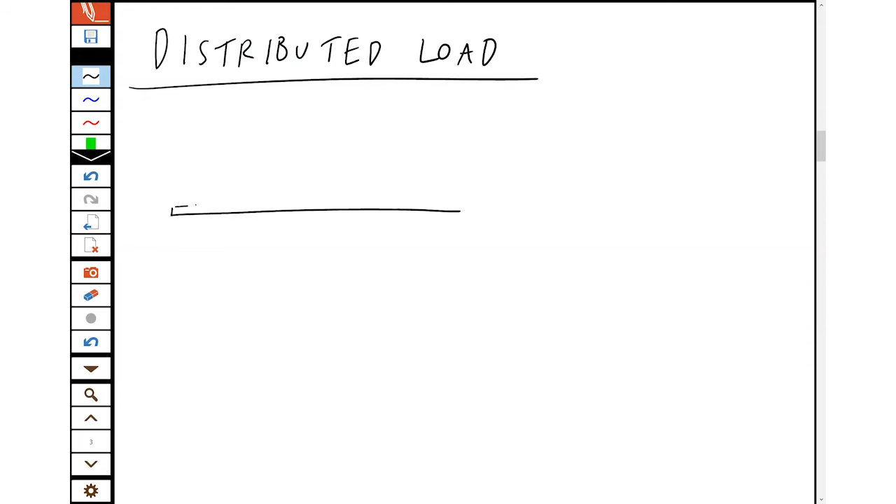Up until now, we've been looking at point loads. We have problems like if we have a beam with a pin at A and a roller at B, and we just have a single point force of 20 newtons down, like there was a mass pushing down there, or there was a beam pushing down at that point. And we'd label that point C just to make it easier for ourselves to deal with.

But we're not always going to have single point loads like that. You might have a distributed load. Like let's say you had a bridge with a lot of cars constantly flowing over it, or you had a bridge or embankment holding up a load of mud or a load of water. Fluid problems have a lot of this distributed load stuff.

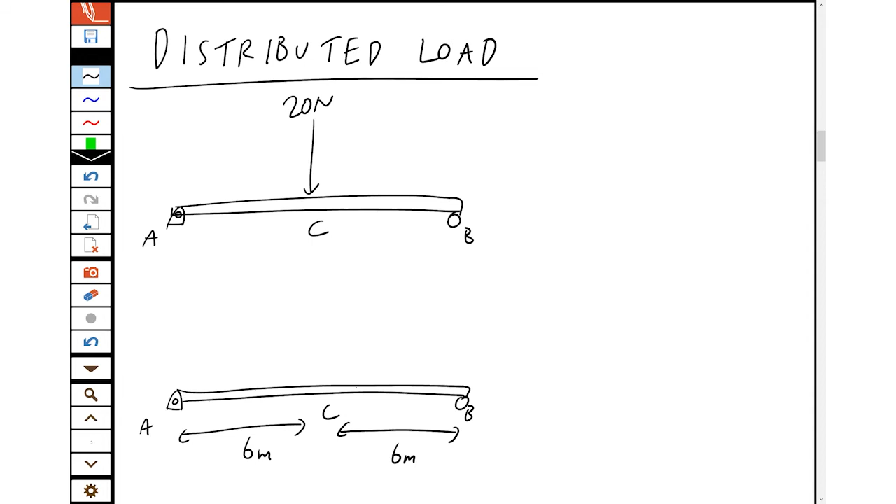So instead, you would have a situation with a pin at A, a roller at B, midpoint C, and instead of having single point loads, you could have distributed loads. Like you might have a constant load of 10 newtons per meter acting all over the beam there, and a load increasing from 0 to 10 between those 2 points, and then be asked to find the support reactions, which would be at A and B.

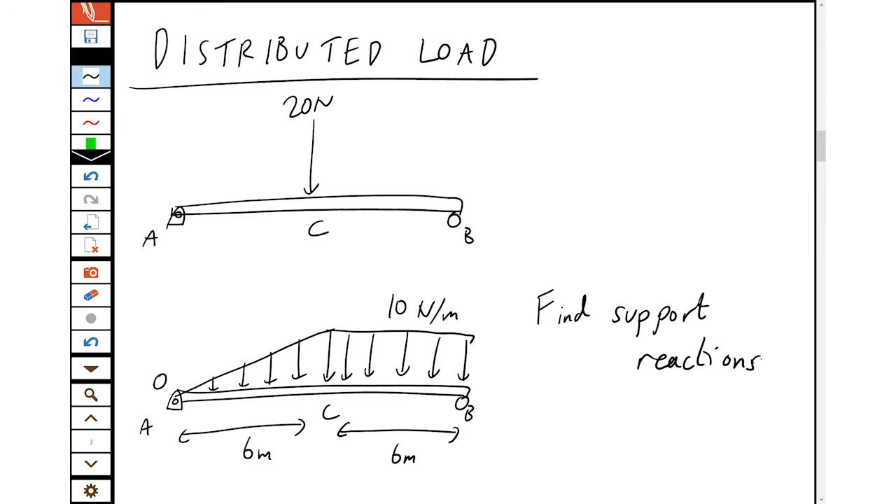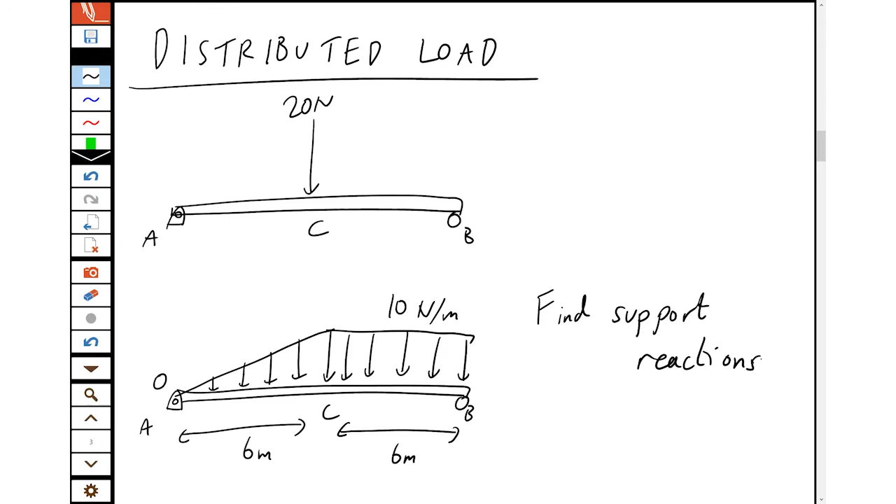Sometimes that's the whole problem. Sometimes that's something you need to do at the start to move into the rest of the problem. So how would we do that? Well, first we have to work out how to deal with these distributed loads, and what we do is we replace them with equivalent forces at certain locations.

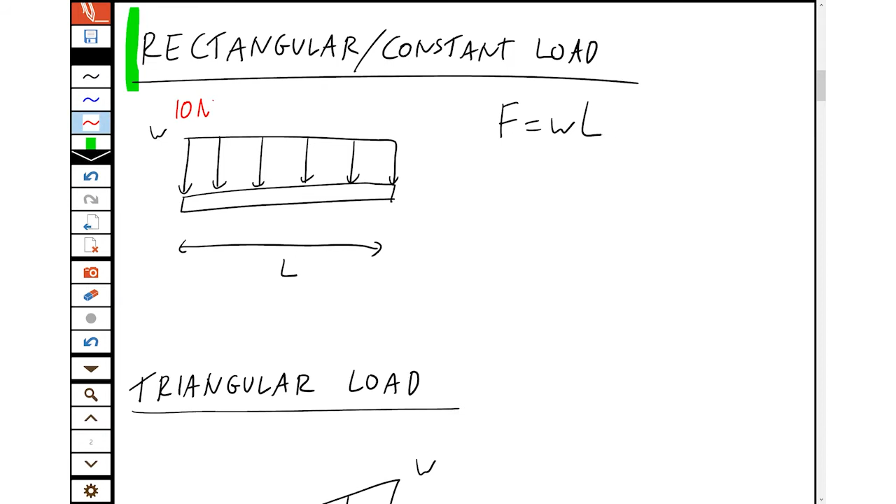The first kind is a rectangular or a constant load. Now we can see if we have a constant load over a length, then the equivalent force is just the distributed load times the length. For example, if this was a load of 10 newtons per meter over 6 meters, then we've 10 newtons for every meter times 6 meters gives us 60 newtons.

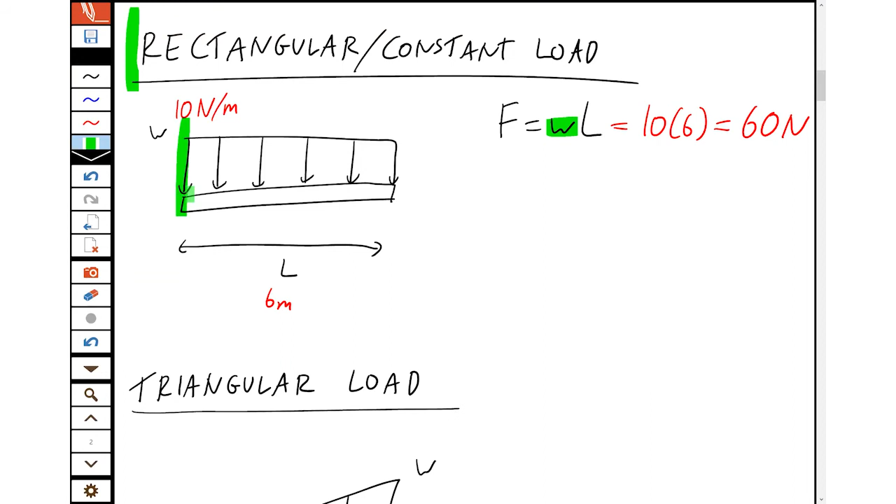Makes sense? And we can see another cute thing about this. This is the distributed load, the height there, times the length. So this is actually the area of the distributed load. And that works perfectly. It's not a one-time coincidence. That's exactly what's going on there. So we can always use that as an idea.

So where do we put this force? Well, this is at the midpoint of the distributed load. It's actually at the centroid of the shape. And the centroid of the load, the center of the shape, is at its middle. So we now have this equivalent force acting at the midpoint, half the length from the edges.

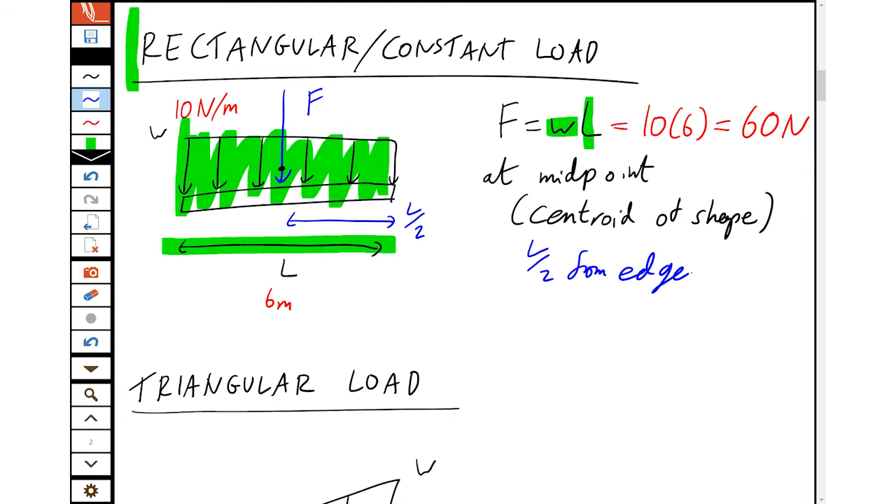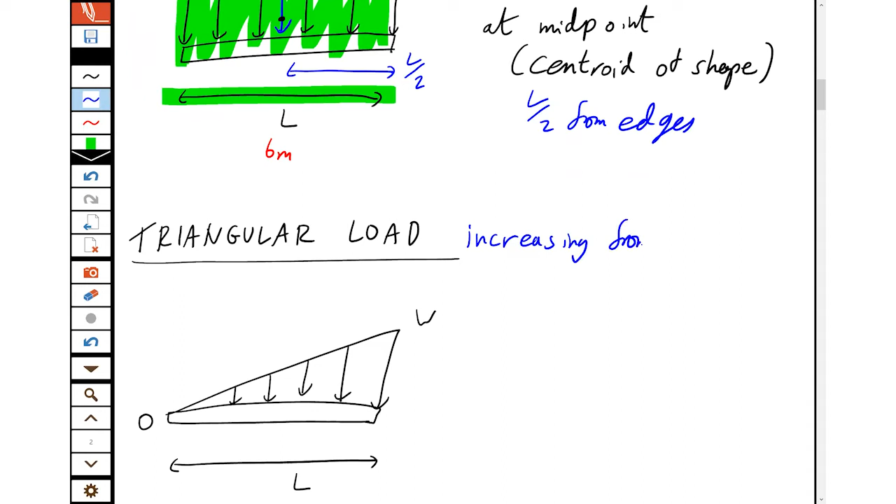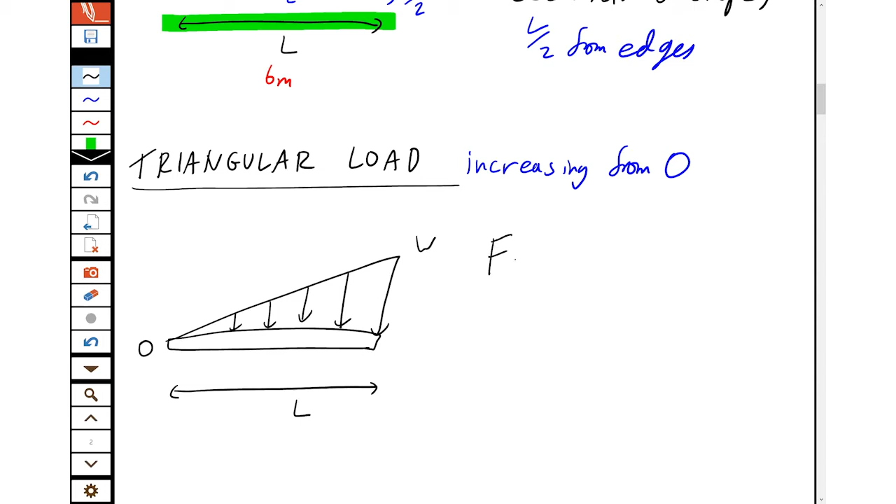The next type of load is the triangular load, which I'd sometimes call just increasing from 0. So we can see here, we've got a load increasing from 0 to some maximum value, and we want to find the equivalent force. Well, again, the equivalent force is just the area of this, which is the area of a triangle. So that's half the height times the base. And that's applied again at the centroid of a triangle, which is a third of the distance from the maximum, or 2/3 of the distance from the 0 end.

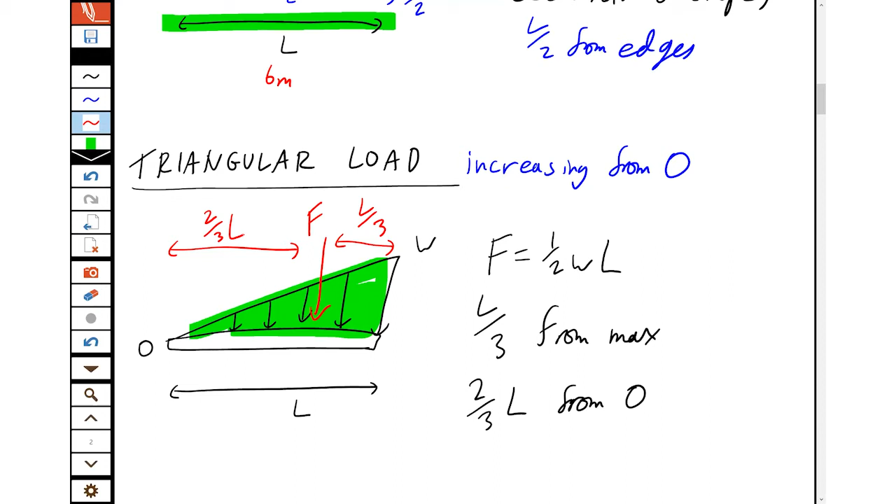So we have that, a third of the distance from the maximum, or 2/3 of the distance from the 0. Why do I specify both? Because one will always tell you the other. Well, when you're doing these problems, your pivot point might be at either end, or it might just be more convenient to know one or the other distance. So it's always nice to have the tools ready to hand.

The third and final type is the trapezoidal load, because it's a trapezoid shape, or I just sometimes call that the increasing load. It's not increasing from 0, it's increasing from one load to a second load.

So how do we deal with that? Well, there's two ways of dealing with this. Whichever you prefer, it's good to know both of them. As an engineer, sometimes you have multiple options. It's tempting just to pick one and that's your best one, but you're better off just having all the tools available because you never know when one or the other might be easier to work with.

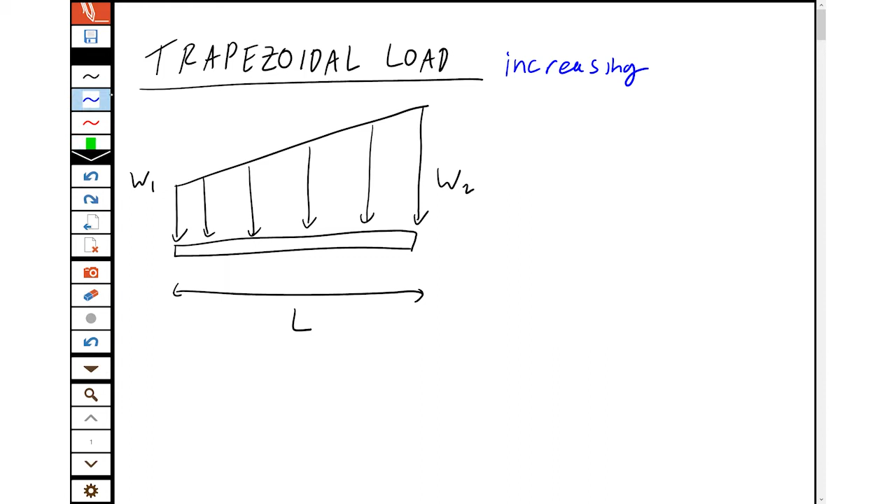The first is we divide it into two shapes. So we have a rectangle, and we know how to find the equivalent force for a rectangle. It's the distributed load times the length acting at the midpoint. So we replace it with our first equivalent force at the midpoint of the beam.

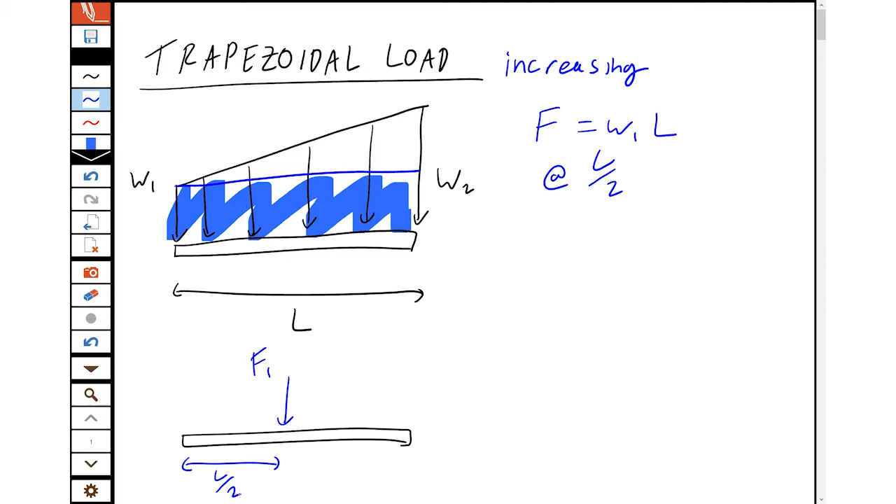And again, notice how I'm always saying the words. If I'm just saying that's F1 at L/2, that just sounds like I'm headbutting a typewriter. It doesn't actually bring the concepts across.

Then the other shape is just this triangle, which has a height of the difference between the two distributed loads. So the second equivalent force is half the height by the length, and that's applied a third of the distance from the maximum, the bigger distributed load.

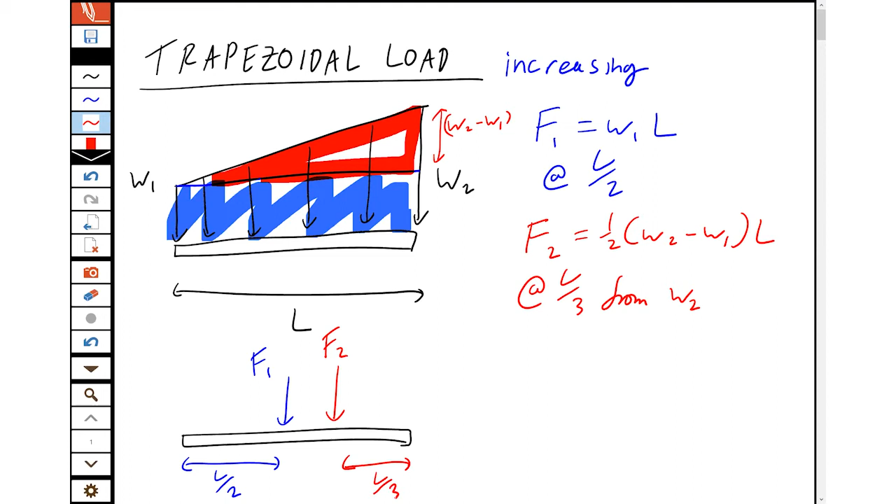And you can see that comes quite nicely down to just two equivalent forces, and that works perfectly well. It's not the only way to do it though.

It turns out trapezoids have existed for a while, so people have come up with a way of dealing with it. If you prefer, you can just do the whole trapezoid in one step.

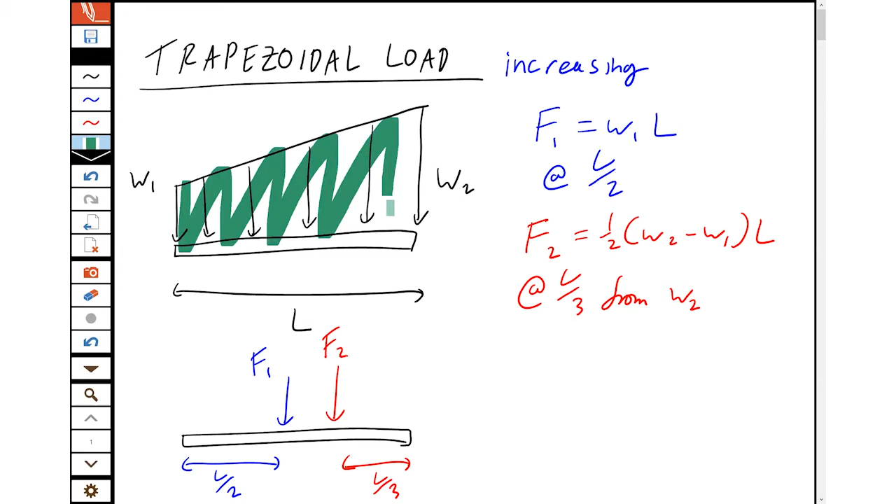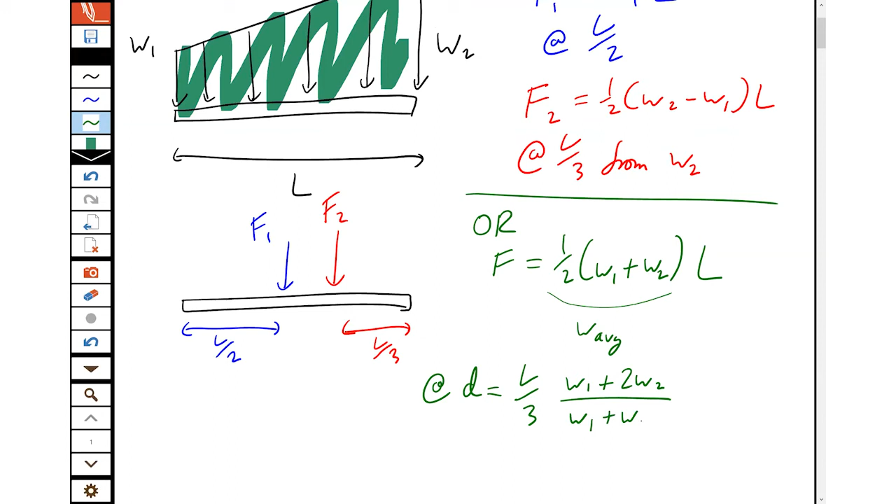The equivalent force is the area of the trapezoid, which is a half distributed load 1 plus distributed load 2 - you'll see that's actually the average of the distributed load times the length. And that's located at a distance a third of the length, times distributed load 1 plus twice distributed load 2, over distributed load 1 plus distributed load 2, from the distributed load 1 end.

And if you're doing it that way, you get to replace it all with just one force that distance away.

If you have your choice, use whichever you like. I tend to prefer the rectangle and triangle because I'm just using the tools I used before more often, which means I'm better at them all the time. But some people like the neatness of the second formula, so I wanted to provide both of those for you.

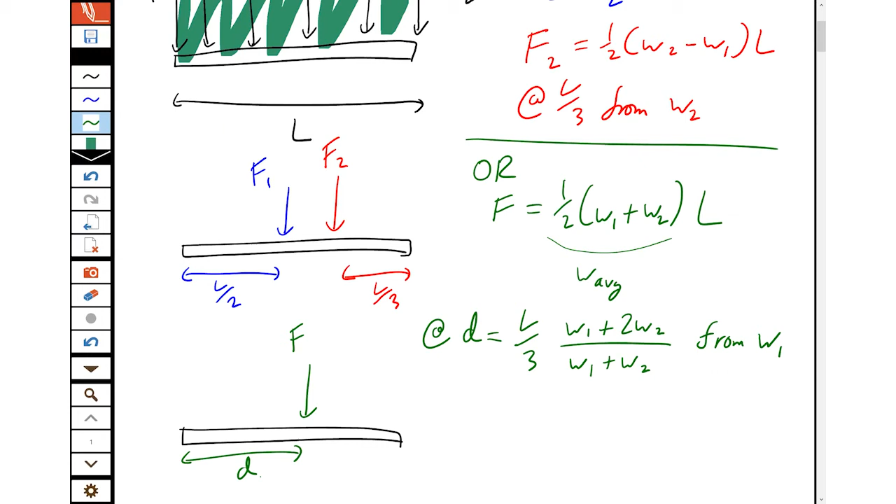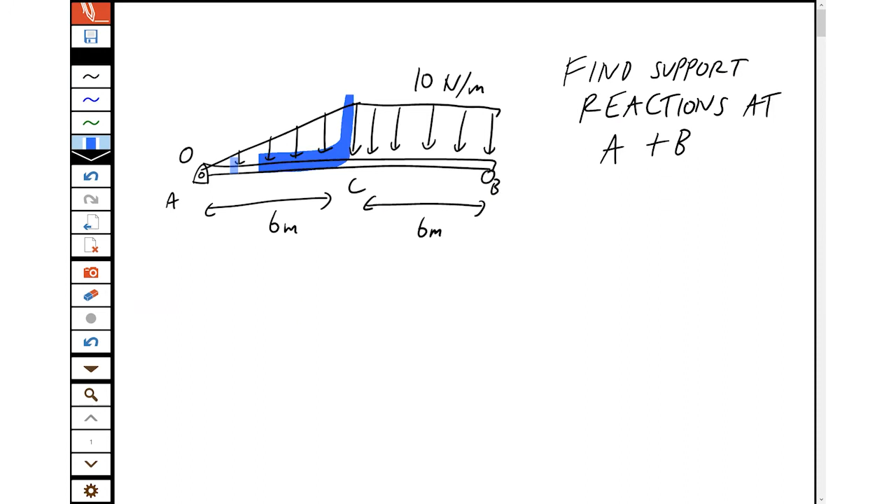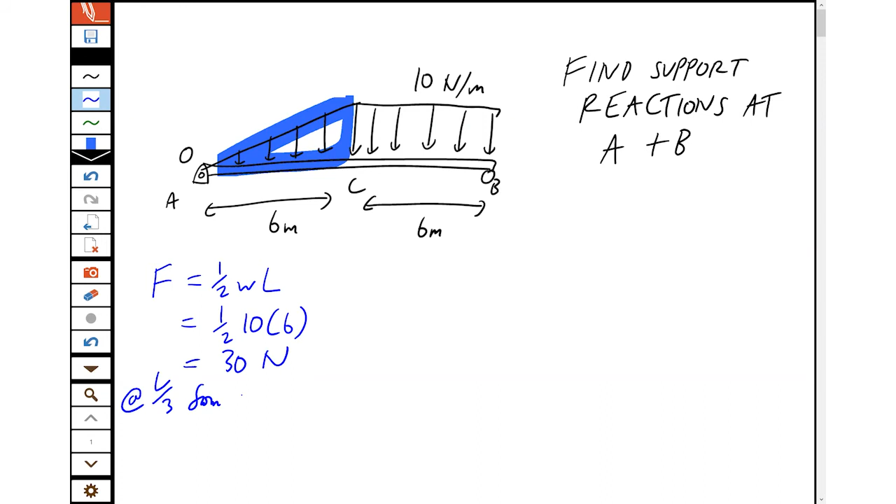We can see the equivalent force is a half the distributed load times the length, which is a half of 10 times 6, which is 30 newtons. And that's at a third of the distance from the max, or 2/3 of the distance from 0. We can see 0 is at A, which is nice and handy, so that's 2/3 of 6 is 4 meters to the right of A.

I always specify the location like that when I'm working it out, because I'm going to have to go back and draw the diagram in a minute, and I'd hate to have to do it again because I wasn't clear.

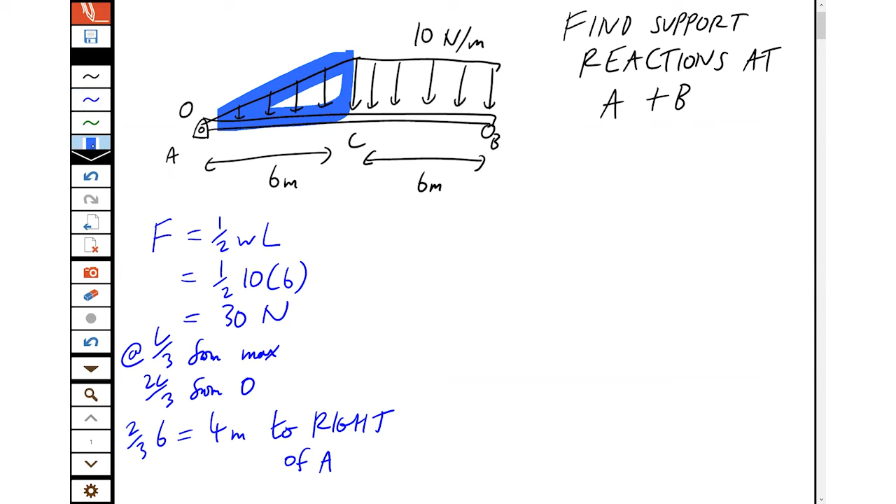Then we look at the rectangular constant load. So we have the equivalent force is the distributed load times the length. 10 newtons per meter for 6 meters is 60 newtons, and that's at the midpoint. So that's 6/2, 3 meters to the left of B, or to the right of C, whichever you prefer.

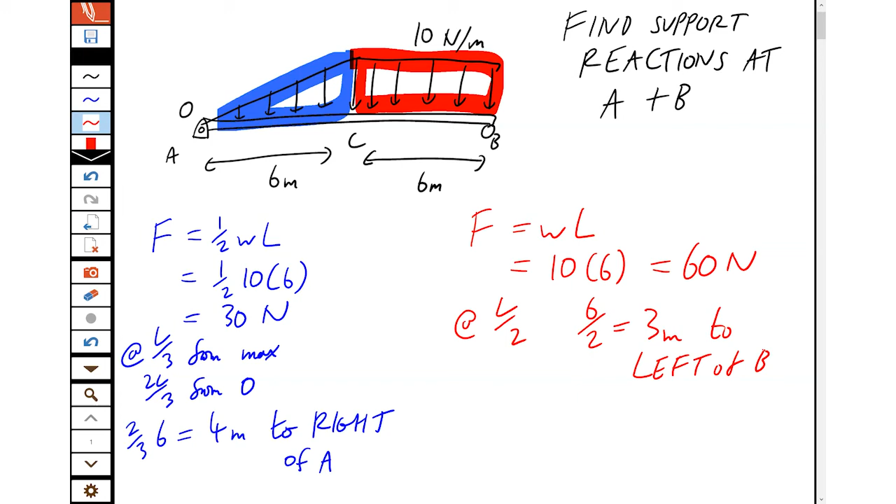So we draw our diagram now. We have A and B. We plug in the forces we found.

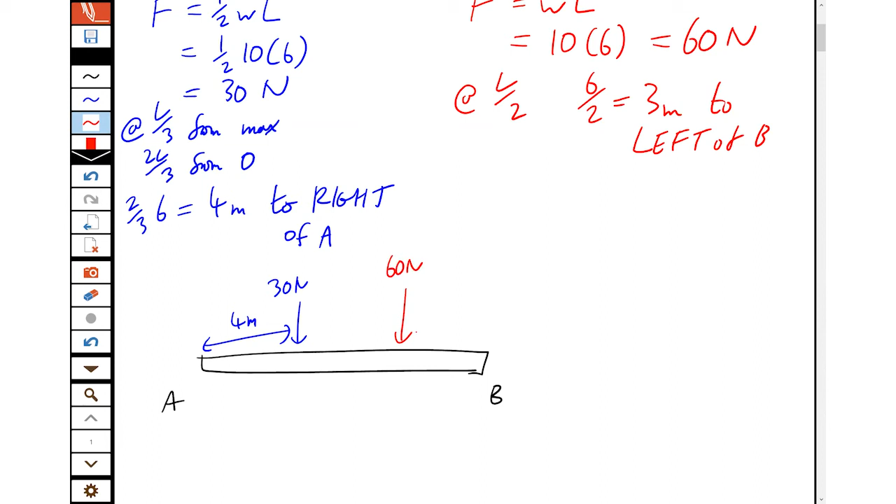We have 30 newtons down, 4 meters to the right of A. We have 60 newtons down, 3 meters to the left of B, which makes it 9 meters to the right of A.

And then we have the support reactions. A is a pin, so it has a vertical and horizontal unknown component. B is just a roller, so it has our friend the vertical unknown.

And then we're on to our standard procedure. Plug in our axes. We don't want to make a mistake with directions, so we always remind ourselves which way is plus.

Always start with the moments. The sum of all the moments around some pivot is 0. We choose the pivot point with the most unknowns, which is A. B would actually work in this case, but we always practice our rules.

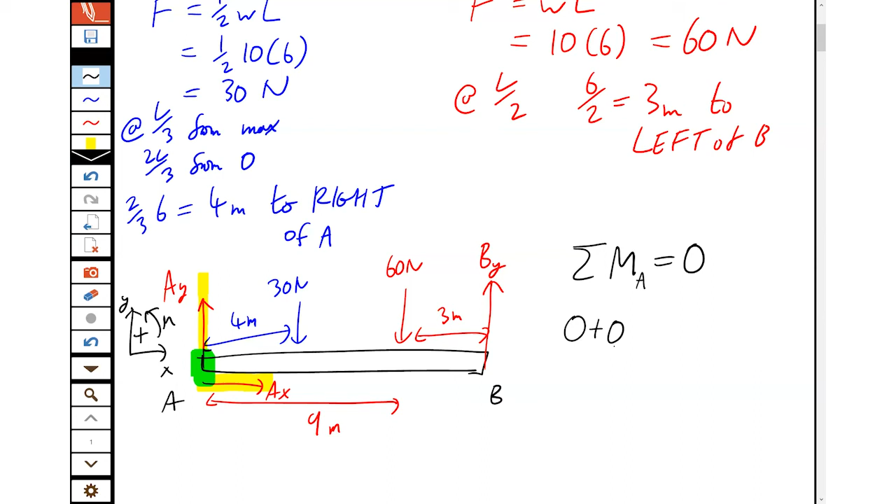So let's go through the forces now. The forces at A, the X and Y components, are pushing directly on the pivot. So they provide no moment. Just like pushing on the hinge of a door won't turn the door.

Then 30 newtons acting down, 4 meters perpendicular, and that would turn clockwise around A, which is negative.

Then we have 60 newtons down, 9 meters perpendicularly away, that would be turning clockwise around A, so that's negative.

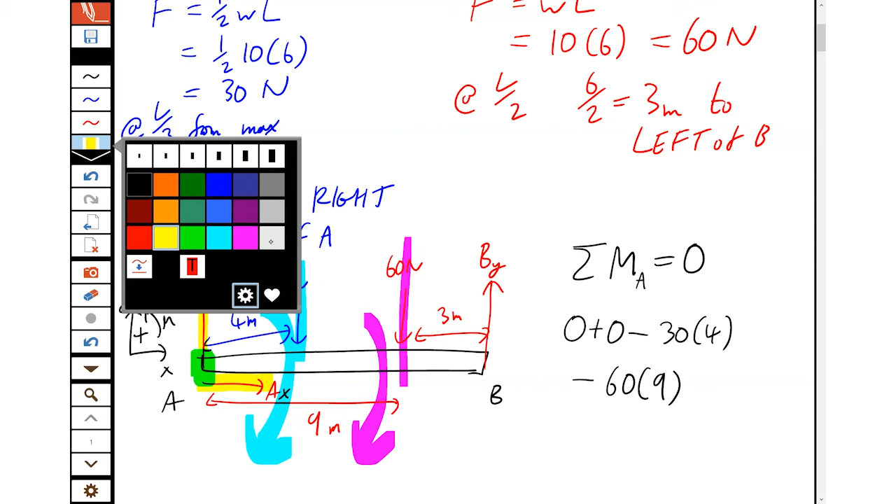And finally, BY, the full 12 meters away, because that's the length of AB. Always complete our little diagrams. And that is turning counterclockwise around A, so that is positive, equals 0.

One equation, one unknown. So we find BY is 55 newtons. That's positive, so it's in the direction we drew up.

Then we move on. The sum of all the horizontal forces is 0. So the horizontal reaction at A is 0 newtons. Never skip that step. Even if something is 0, you've got to show it's 0.

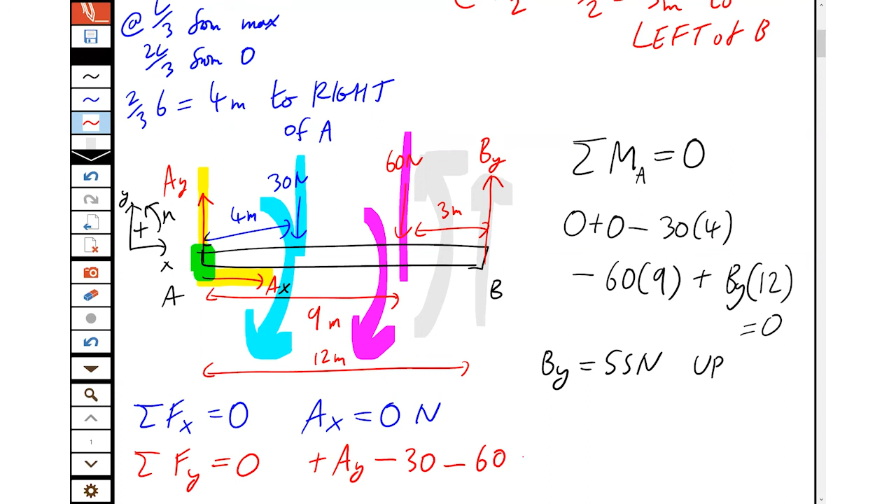And then the sum of all the vertical forces is 0. So plus AY up, minus 30 down, minus 60 down, plus BY up is 0. Well, we know BY, that's AY minus 30 minus 60 plus 55 is 0. So AY is 35 newtons.

That's positive, so it's in the direction of the arrow we drew, which is up. And that's the support reactions for that beam.

And you can do that for any distributed load question. You reduce all the distributed loads to their equivalent forces, and you can solve just like a force problem. Just remember, if later on in the problem you cut it apart or break the distributed loads into pieces, like if you've chopped the beam halfway, then you have to do the equivalent forces step again. You just can't assume that everything's the same as before.